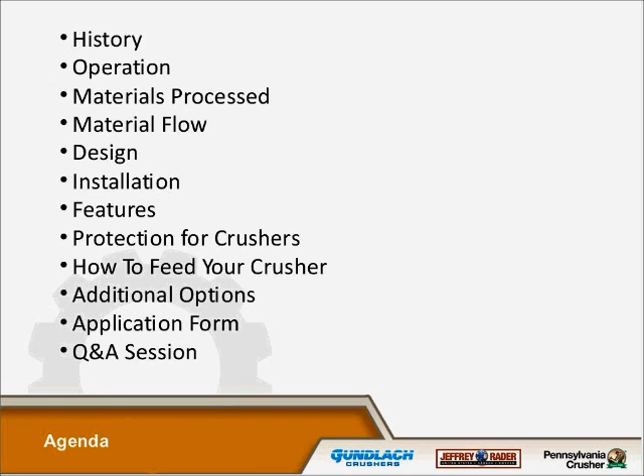The crushers are applied in coal mining, coal preparation plants, power plants, refineries for crushing petroleum coke, steel industry for metallurgical coke, industrial minerals, fertilizers, potash, clay, nickel ore, and several other ores. Lime, limestone, fluidized bed boiler sorbent is one of the things it's used for. Aluminum industry, the bath and anodes, which is a recycling circuit in the aluminum plants. Salt, glass, among other applications.

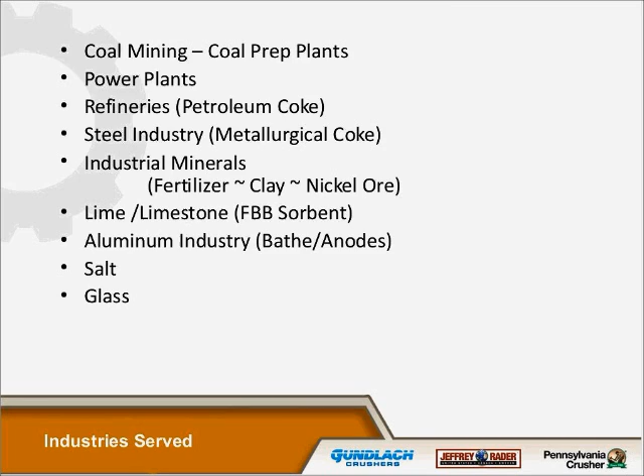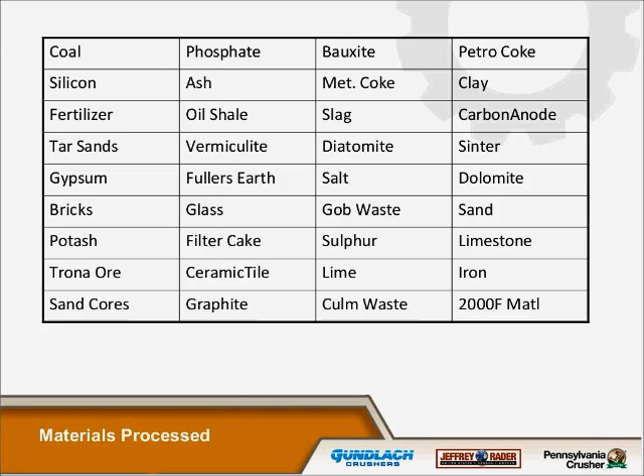The types of roll crushers are: single roll against a breaker plate, the single stage 2-roll crushers, 2-stage 4-roll crushers, and special designs for hot material and sticky materials.

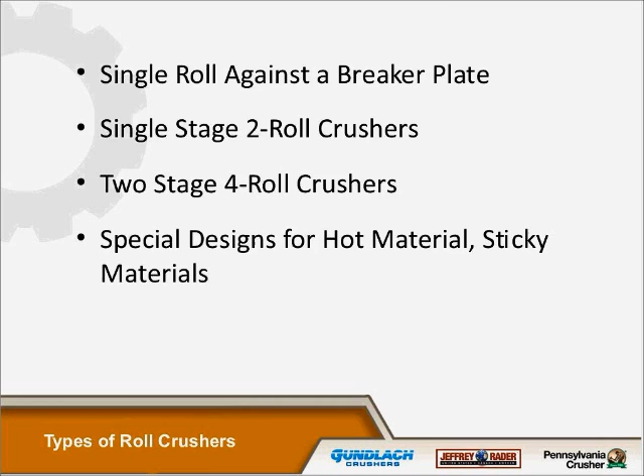The single roll was developed close to 100 years ago to crush run-of-mine coal. The 80-30 breakers were developed in 1972. Many are still operating in the Powder River Basin, Wyoming, New Mexico, Arizona, and South America. The breaker was developed to perform primary and secondary crushing all in one unit. It has approximately a 24-to-1 size reduction, run-of-mine down to 2-inch or 50 millimeter. A smaller model 4-roll crusher was developed for Stoker, the house coal, back in 1948.

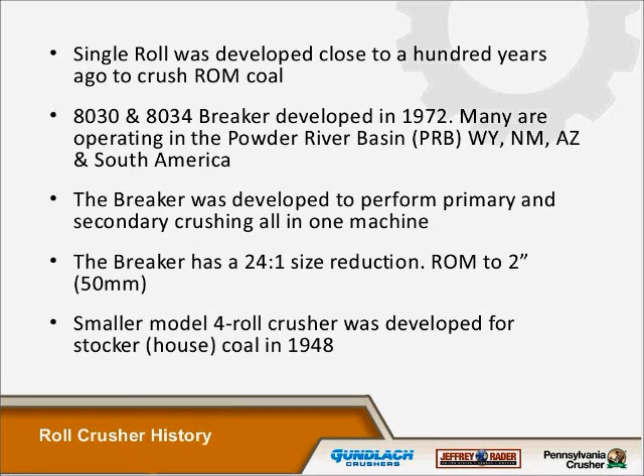The 80-30 breaker is definitely a workhorse in the industry. Most manufactured back in the 70s are still operating. The breaker started off as a 2-motor drive, definitely a 4-roll, and it's evolved to 4-motor drive, also employing the Nitroil system on the machine, which I'll talk about a little bit later. This machine can take up to a 60-inch lump and size it down to approximately 50 millimeter.

The machine is also carriage mounted for ease of maintenance. If you get a non-crushable in this model, it has approximately a 28-inch stroke in the main cylinders and approximately 5 inches of stroke in the secondary cylinders.

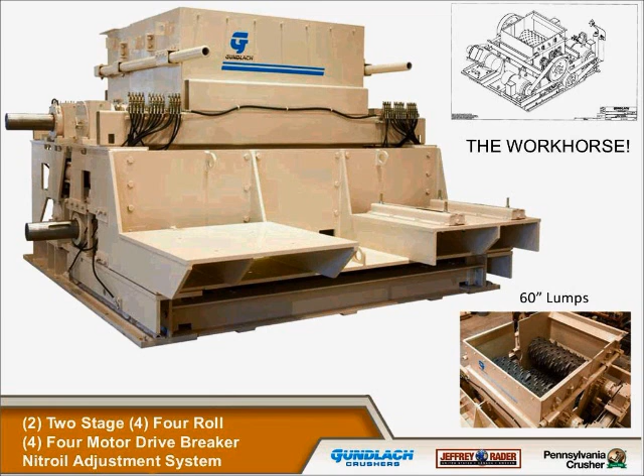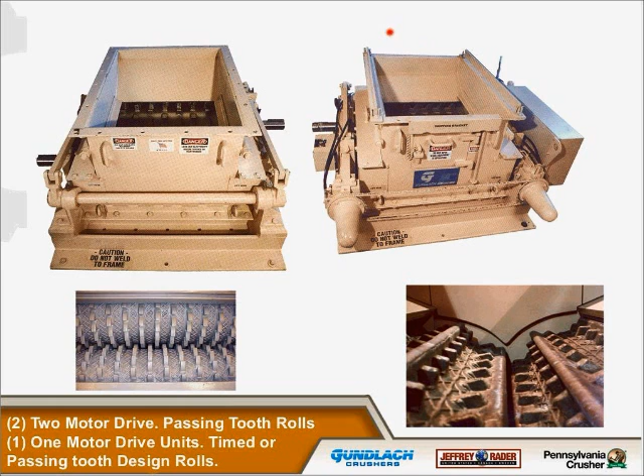This model also has maintenance doors, has dribble chutes. Any material that could come out of the crusher box will go down into the discharge area, which is incorporated into the discharge chute.

The 5000 series has an electric pump for moving the oil into the cylinders for roll positioning. The Nitroil system basically works like a gas shock on your car, but you can add or subtract the nitrogen pressure or holding force to keep the rolls in position while they're crushing the feed. The Nitroil system also gives you a nice quick way of adjusting the roll gap. By manipulating a couple valves with the electric pump, you can adjust the rolls in very short time.

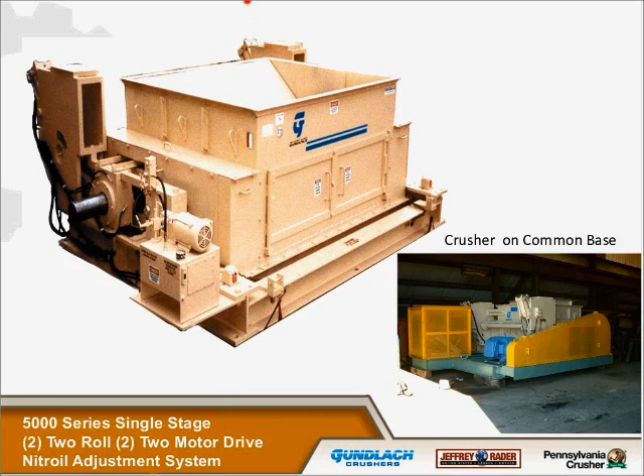The single stage is again a primary reduction, 6-to-1 reduction ratio, and like I said, the frozen coal cracker is basically for summer use. They are V-belt driven.

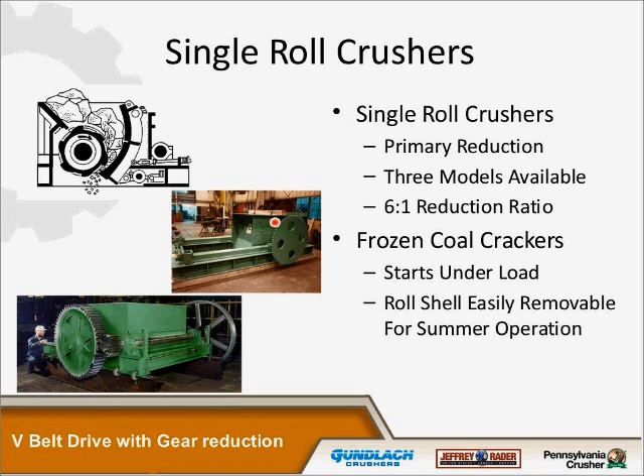The two-stage four-roll crusher, the model you're looking at is a 3000, and when I'm speaking about the series machines, we have 1000 up to 5000 series, and the bearing shaft sizes and the other componentry just get larger as the crusher gets larger. So this one is a four-roll, one-motor drive.

Chain secondary drive drives the top rolls to the bottom rolls. The gearboxes, the upper gearbox here drives the upper rolls, keeps them in time, and the lower gearbox connects the two lower rolls and keeps them in time. This machine can take up to a 24-inch lump.

This model would be a 3000 series. 3 and 15/16 shafts, double spherical roller bearings, Nitroil system, and a standard lubrication system, which is a bulkhead, one on each side of the machine.

The 5000 series is the only one that has the electric pump. The other machines have a hand pump.

The 4-roll basically was developed so the upper rolls are to pre-crush the material, giving the lower sizing roll an acceptable size so you don't get any buildup between stages.

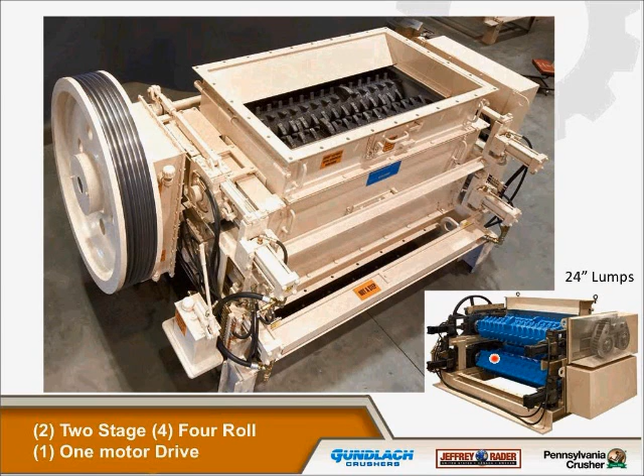Normal reduction we like to see is like a 3 to 4 reduction. That's each stage gives you that reduction. A 4 to 6 foot drop is ideal. The trajectory of the feed coming into the crusher is very important, spreading in the material across the entire length of the rolls.

Grab material, crush material, discharge, and take the material away properly. Retaining material generates fines and wear. So basically we want to take the material, grab it, crush it, and discharge it. Retention creates fines and wear.

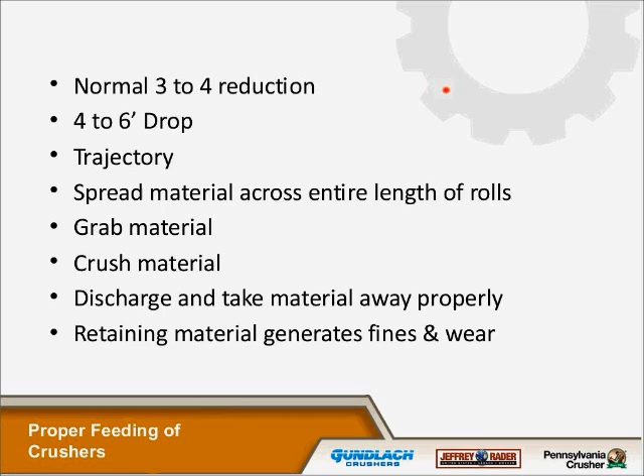Just showing another picture of how the material comes into the machine. Again, if the material gets too large, it'll basically popcorn on the top of the rolls, and the rolls will chew away at it, but the problem is it's got all this other tonnage coming on top of it, and it doesn't have time to do that.

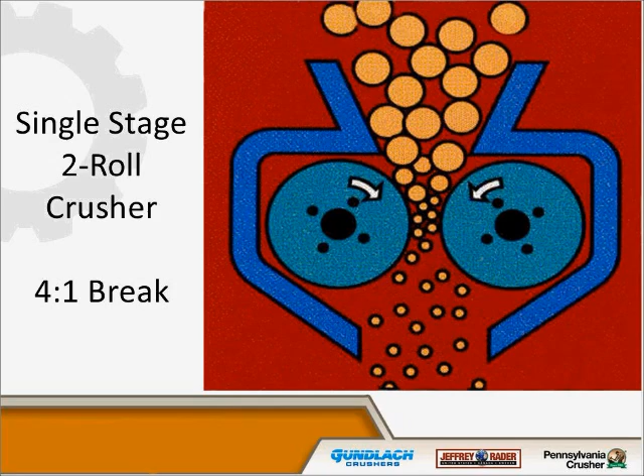Again, the 4-roll machine, 4-to-1 break top stage, 4-to-1 break bottom stage.

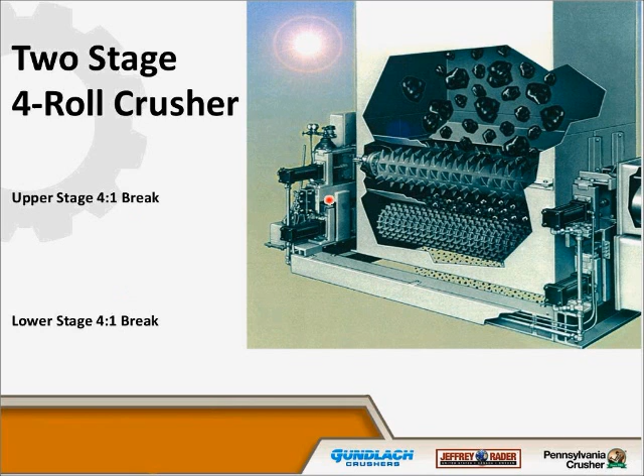A good way to feed the machines is a vibrating feeder. Jeffrey Rader makes a real nice vibrating feeder. Electromagnetic or electromechanical are brute force type feeders. This spreads the material across the length of the roll and allows the material to drop into the crusher rolls properly.

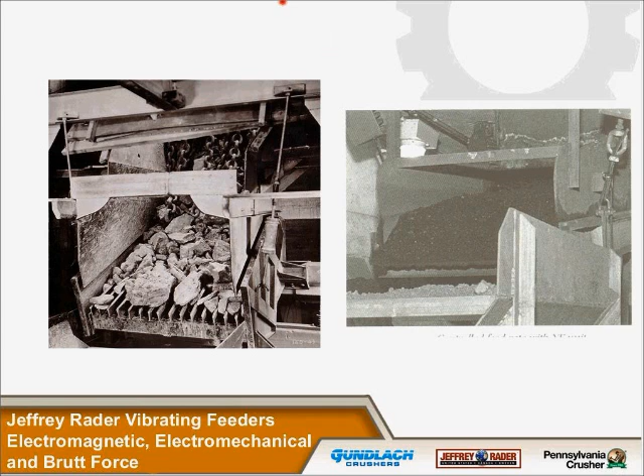It's a typical installation drawing that we send with quotations. Shows what we like to see. We do realize that retrofits, it's a give and take situation with the retrofitting of a machine. But this installation, if the equipment's put in properly like this, having the proper drop, spreading on the material, and a proper discharge area underneath the machine, you want to take it away as fast as you're putting it in. It works out very well.

We even put in the type of trolley beams and lifting devices you'd need for the crusher rolls and motors and other things like that. Protecting the equipment is always important. Magnet, metal detector is important to protect your equipment.

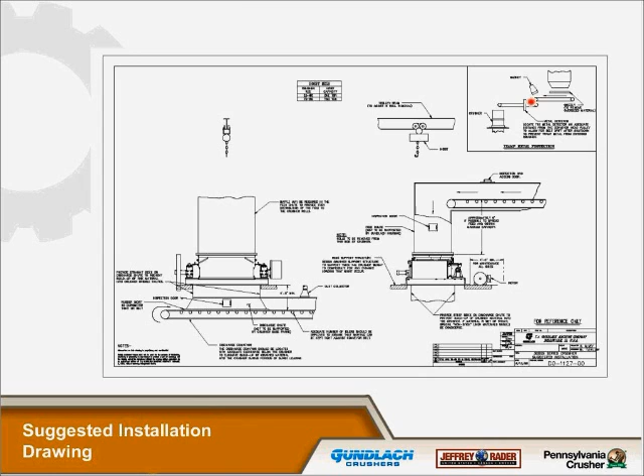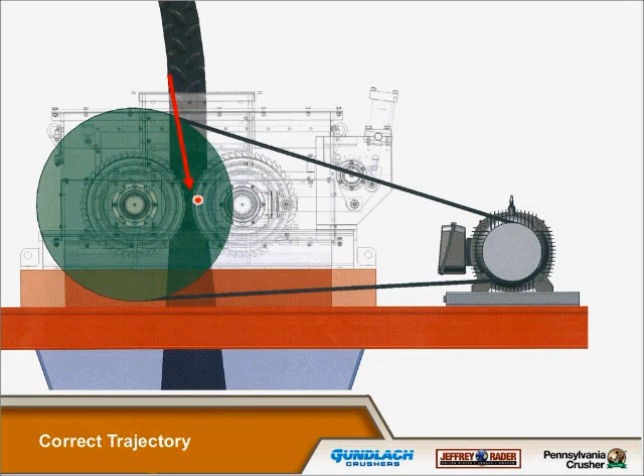Shows another slide of how the material should come into the machine. Like I said earlier, the nitrogen system that's on the machine is preset with the pressure to hold the crusher roll in to do the normal crushing. But yet if a non-crushable enters the machine, this roll will force that pressure back, cylinder back, and allow that non-crushable to go through, basically overcoming the preset pressure. The pressure can be increased, but that allows for more pressure to force the roll back.

It's showing how the material should be spread across the length of the roll to get your maximum throughput. Maximum roll life is very important. The capacity is determined with the roll crusher basically by your roll gap, roll length, the speed of the roll, and the RPM.

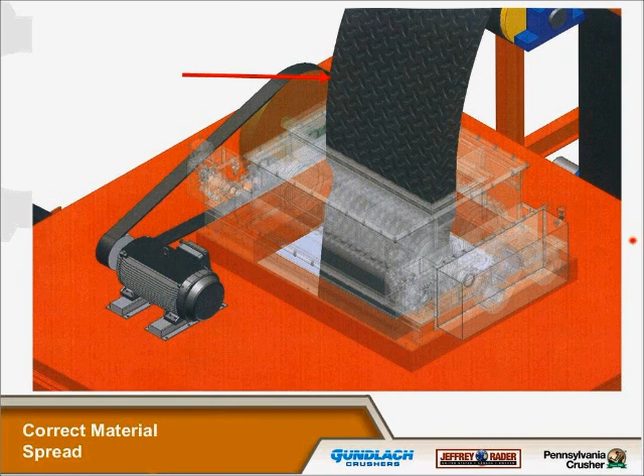This is a view of what some of the rolls look like if you're not feeding it properly. This front roll here basically was beyond repair because it got into the base metal of the roll. The other one, the teeth are still intact. That can be rebuilt. But it's important to spread that material across that entire length of the roll.

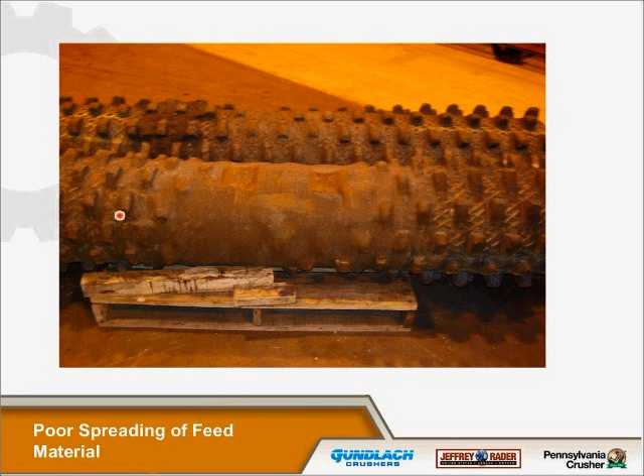This is another set of rolls that were not being fed properly. They lasted about 6 months. Fortunately, they pulled them out because they were having some capacity problems, so they will be rebuilt.

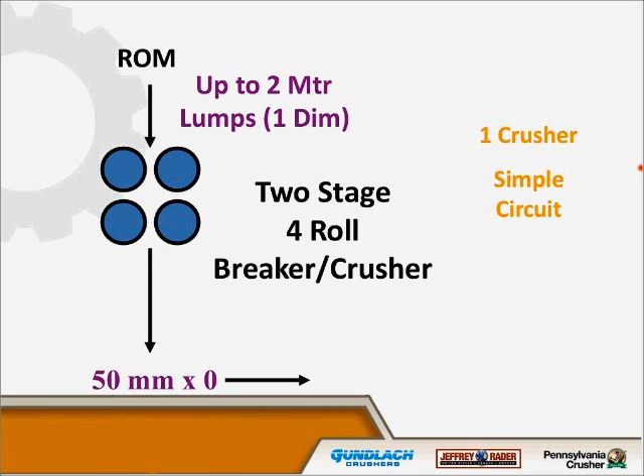One of the simple installations is a simple circuit, basically with the 4-roll. Like I said before, you're taking the run-of-mine material and crushing it down to 50 millimeter.

It works really well in run-of-mine applications. Some of the other applications, material warm or hot, 350C, boiler clinker feed, let's say 25 millimeter by 0, product 95% minus 8 at 12 metric tons per hour.

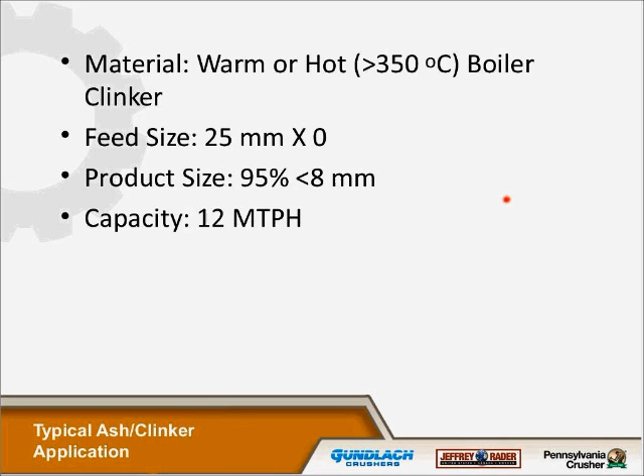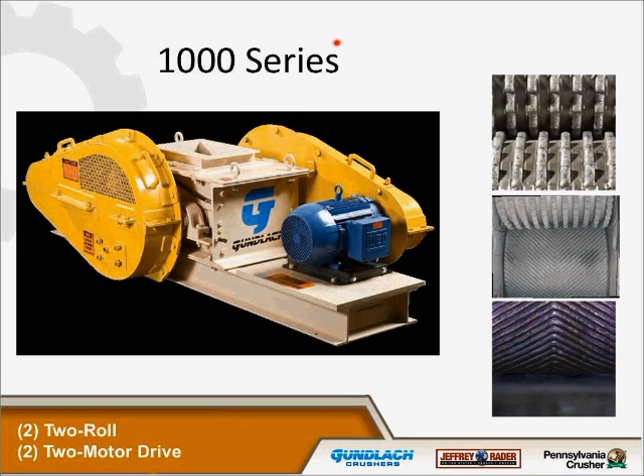We've installed some of the smaller machines for these applications, 2-roll 1000 series, with different roll configurations we can put in this machine: the smooth, small chisel tooth, or herringbone.

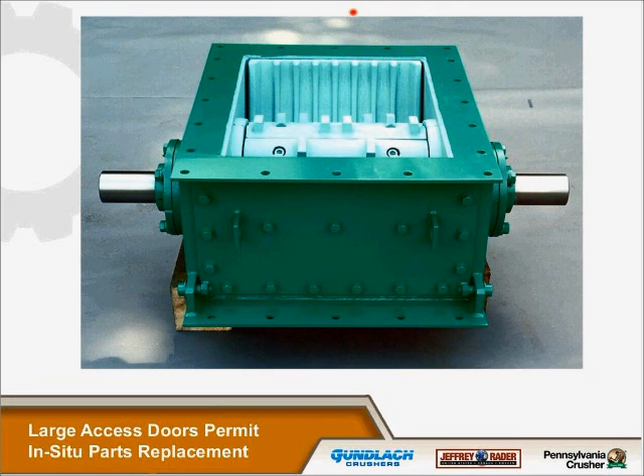The other machine used on clinker before is the single roll, easy access, well sealed. You can replace the parts definitely in situ. As you can see, the side folds down and you can access the wear components very easily. Again, this is installed mostly in bottom ash or clinker installations.

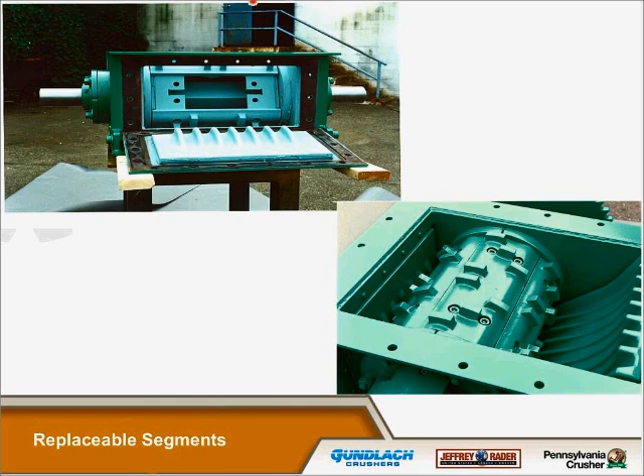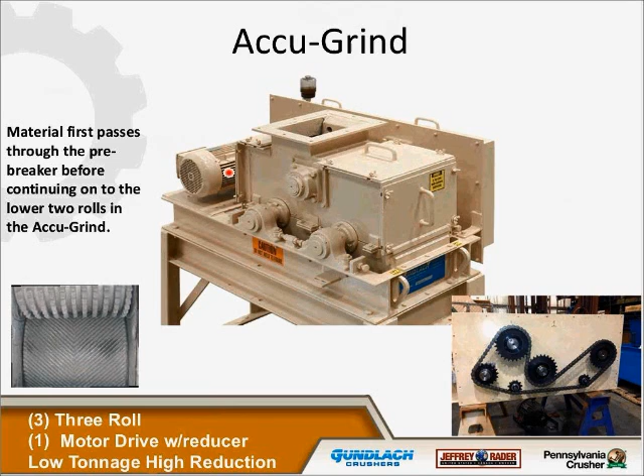Some of the features of the machines, we definitely have some unique features. I'm not sure of any other manufacturer that sells crushers with coupling mounted rolls.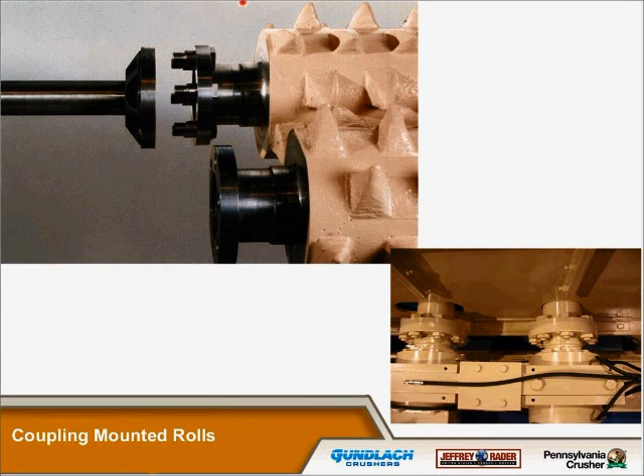The coupling mounted rolls are set up so that you don't have to disturb any of the main bearings to get the rolls in and out of the machine. We do have some models that are not coupling mounted, but the majority of the machines are coupling mounted.

As you can see with this slide, the rolls are out of the machine. Main bearings are not disturbed. We do have to loosen V-belts and support the pulley because the rolls are supported from side to side of the crusher.

We supply the removal rails with the machine. It's actually a tool to support the roll until you get it out where you can pick it up with your lifting device.

One of the other things that's really important is don't allow any of your chute work to rest on our crusher, because of roll removal especially. Plus, we don't want the weight of the inlet chute on our crusher.

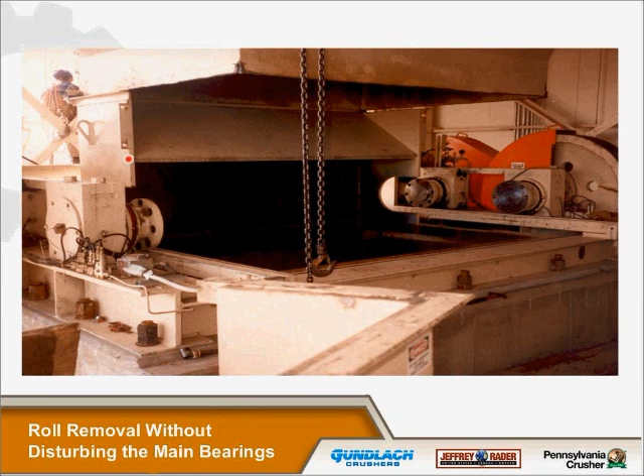The housing, as you can see, is split in many different ways for ease of removal, and the chute resting on the crusher would be a real problem.

The machine has wheels on it to raise it up and move it from underneath the flow of material, mostly for maintenance or replacing of the crusher.

The guards, we actually manufacture the guards. We split the guards for ease of removal. Works out very well.

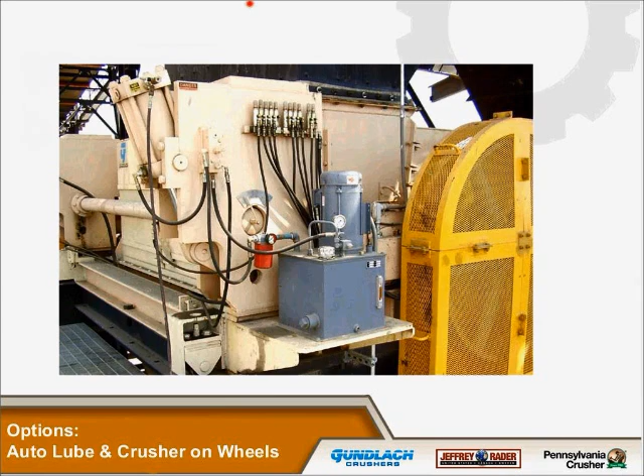Some of the other features are segmented rolls. On the 4000 and 5000 series, we have segmented rolls for the 24-inch, 30-inch, or 36-inch diameter rolls. The segments could be 40 inches long or 20 inches long, and there are 4 around the circumference of the roll.

It makes for a real nice change out for maintenance, because in the larger crushers the rolls are very heavy, and removing rolls can be a little safety issue. So having segmented rolls works very nicely so that you don't have to even take the roll out of the machine.

The upper rolls can have segments on them with grab teeth. The lower rolls can have segments on them with the chisel tooth. Segments can be rebuilt many times; normally about 3 times is a good life of the segments.

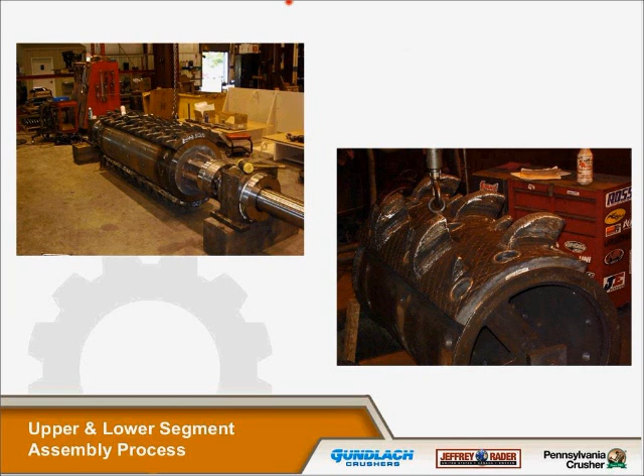To extend the life, we've incorporated a chisel tooth with a carbide tile on the front. It's welded onto the tooth and has little carbide chips in it, which helps extend the life of the tooth. We also have available a tooth, an entire tooth with carbide made into it.

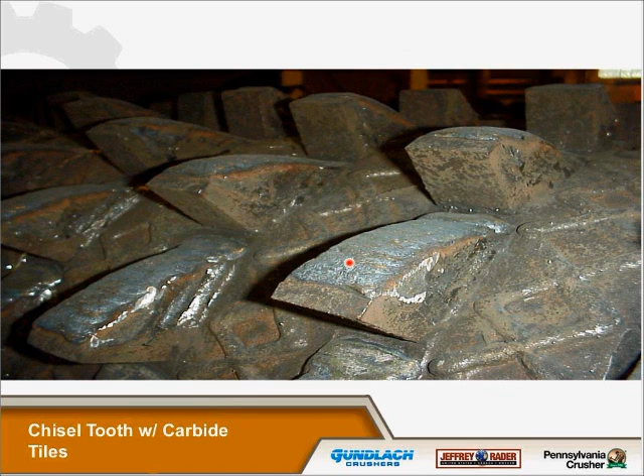The bearings on the machines are double spherical roller bearings, self-aligning. We have a series of seals, kind of like a taconite seal. It's a lip seal on the outside, a felt, and a labyrinth on the inside. This helps prevent wash down of the equipment, the water and so on, from getting into the bearings. Very good seal arrangement.

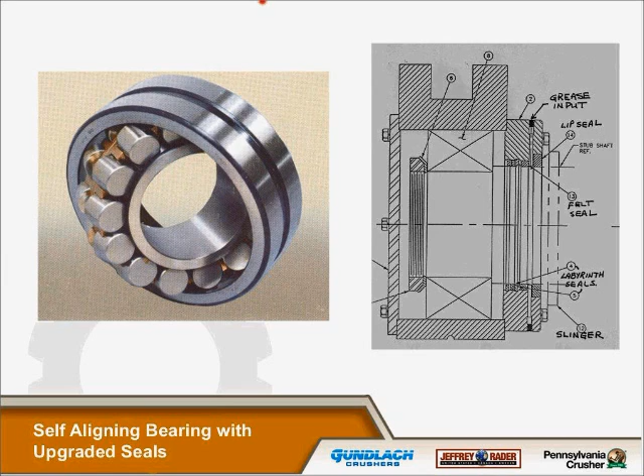As you can see, the housings, as I mentioned earlier, are split quite a few different ways. You can get them where they don't have as many splits, as you can see in this piece here, but it makes it very easy for roll removal.

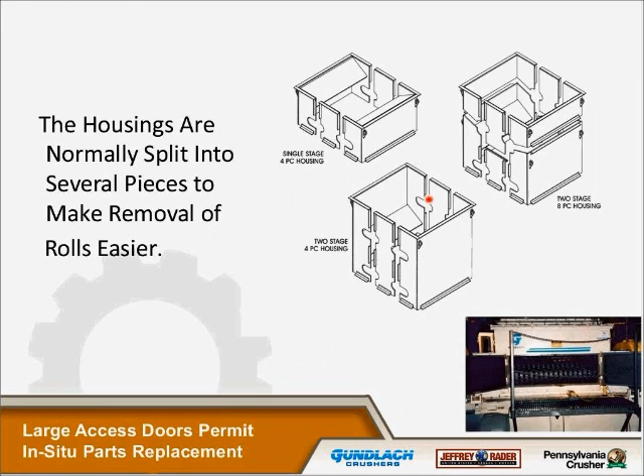The slope plates in the machine help divert the material into the center of the roll. They can be made of carbon steel, can have a ceramic lining on them, or can have AR plate on them, whether bolted or plug welded. It's just a choice of the customer.

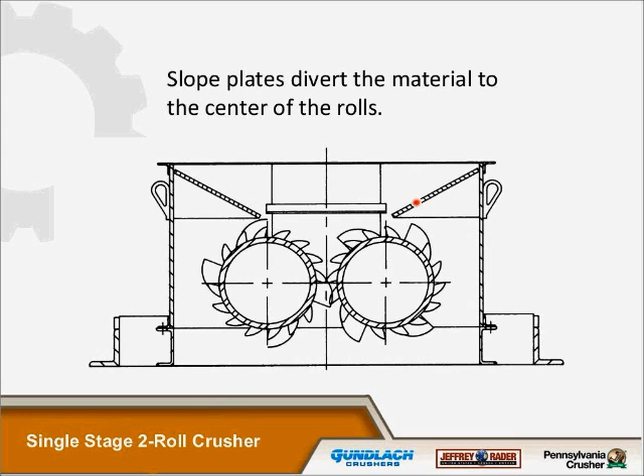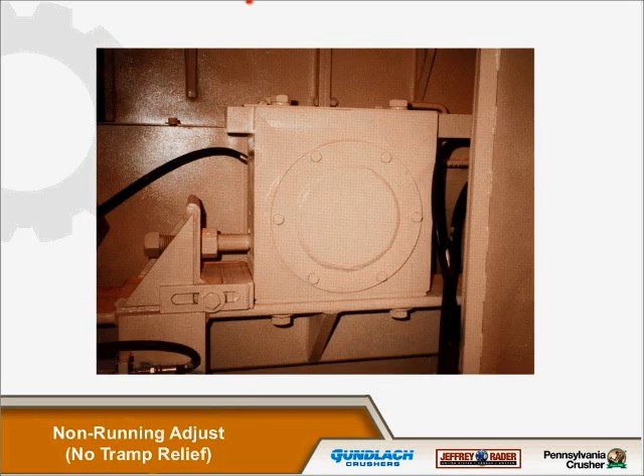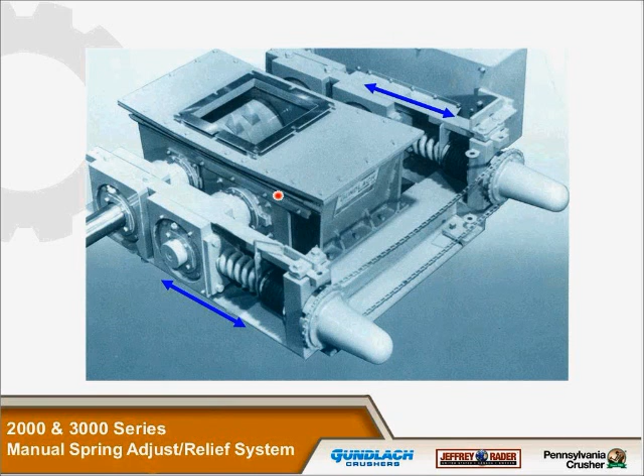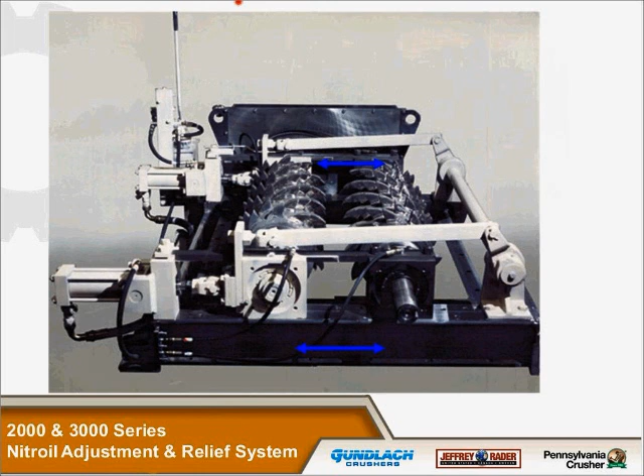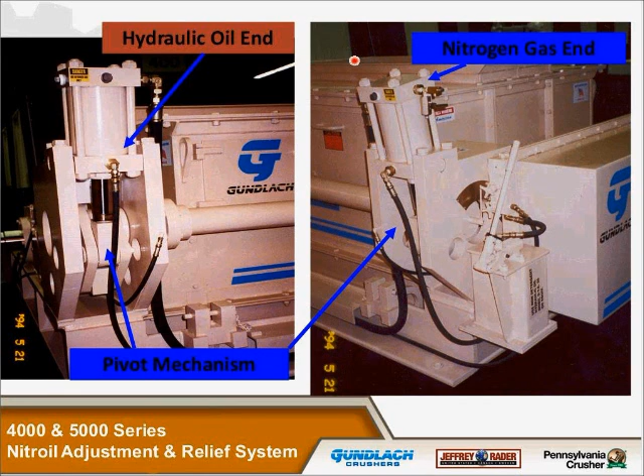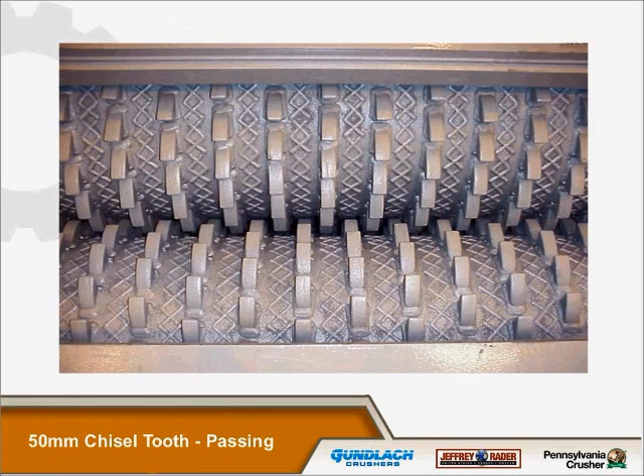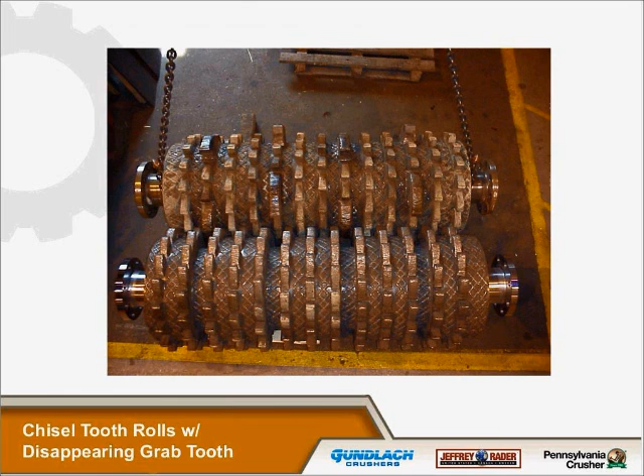Lower chisel tooth, or could be primary set of rolls, passing tooth design. A disappearing grab tooth style, where the crusher is very close to requiring an upper set of rolls, but yet we can get by with a passing tooth design.

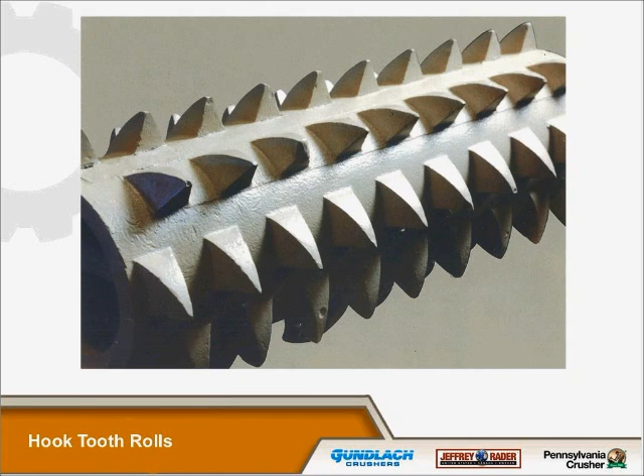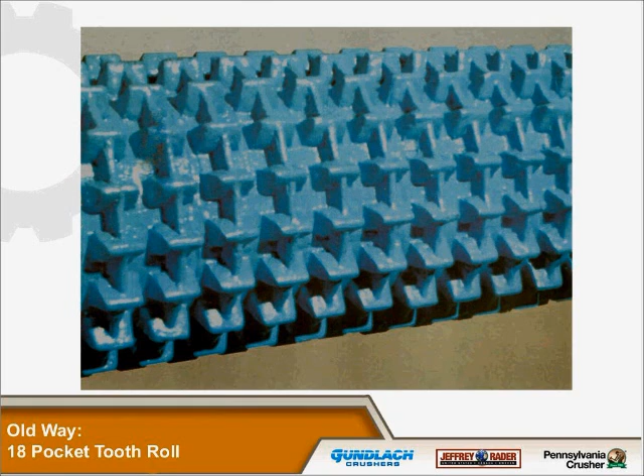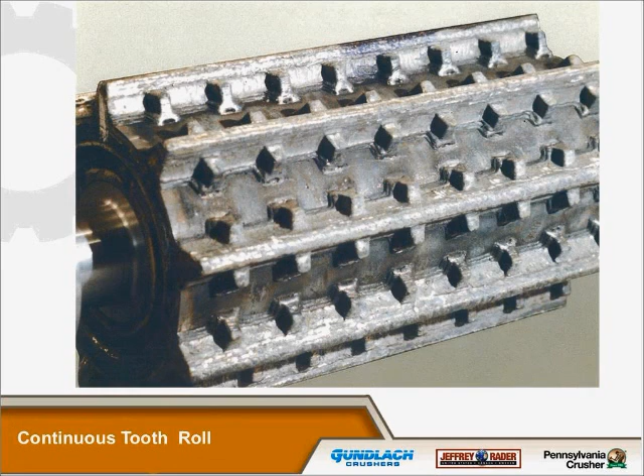The hook tooth design was the original style upper roll for crushing material down to a nominal 2x0. An original 18 pocket tooth roll for making a nice stoker — this roll is still available in the segmented design, however it's been replaced with a continuous tooth type roll. Very comparable product sizing between the two rolls.

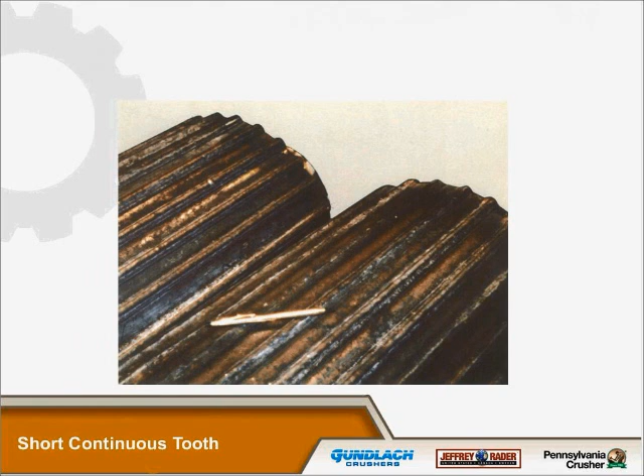Another continuous tooth roll, a little shorter, makes a little finer product. This is a shorter pocket tooth design — you can see where the rib is continuous, the tooth is continuous, and the rib is broken.

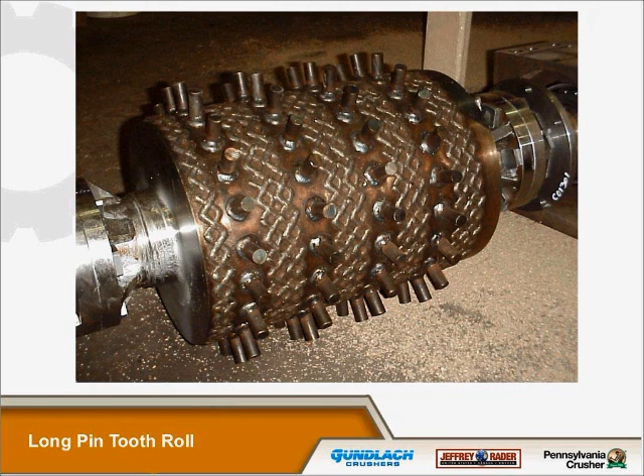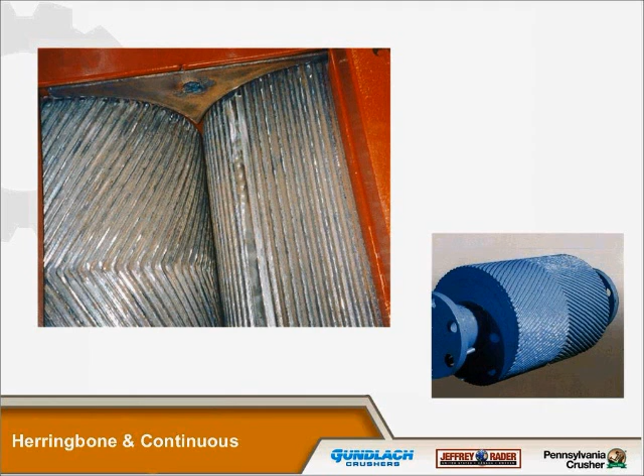The herringbone style roll could have a straight pattern or the chevron pattern. The diamond pattern is basically a double herringbone.

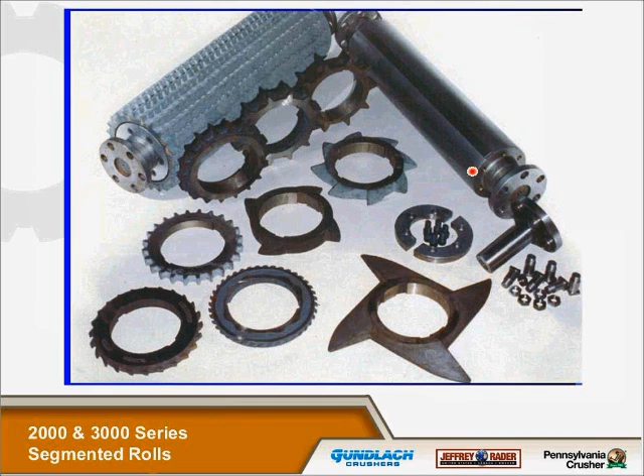Segmented rolls, circular segmented rolls, are for the 2000 and 3000 series. They can be used for clean coal, fertilizer applications, and hot applications. You can put different style segments on the backup roll and configure your roll.

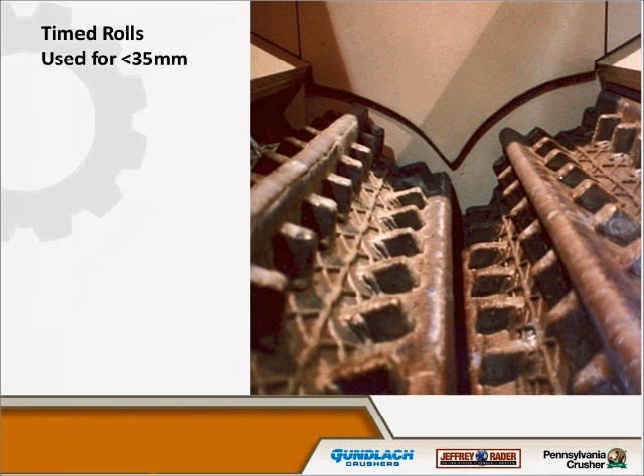Again, the continuous tooth requires a gearbox. We can crush down to, actually, timed rolls used for minus 35 millimeter. We do a really nice job of three-dimensional crushing — it crushes in two different planes, where you're crushing in this plane and this plane here, where these teeth come in and mesh.

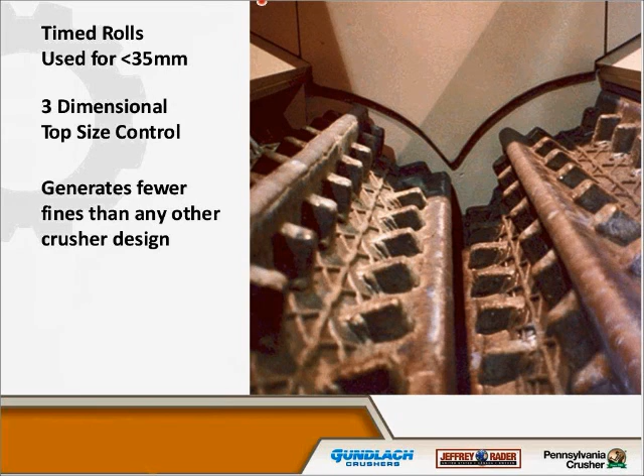They generate fewer fines because we're only crushing what needs to be crushed. Impact crushing smashes the material, creating excessive fines.

These crushers, basically we're doing compressive crushing and not creating a lot of fines.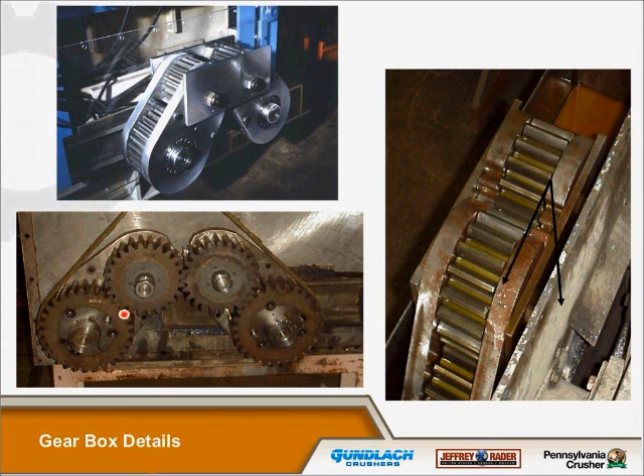The gearbox is also designed as an enclosed gearbox, we call it, where you can bench build it. You can get a spare gearbox, send it in, we'll rebuild it. We have templates we can use, and send it back to you all completely rebuilt with a warranty on it.

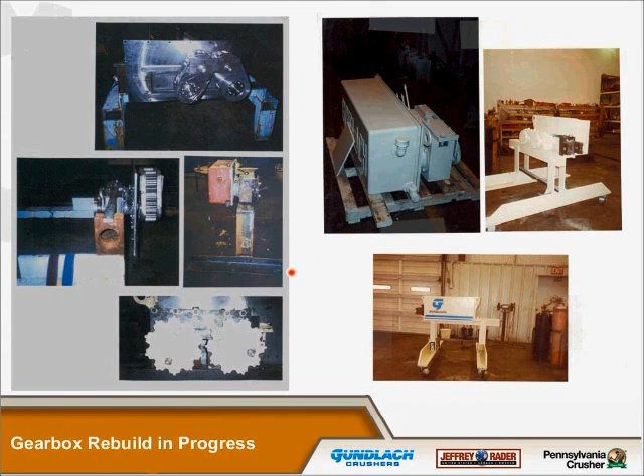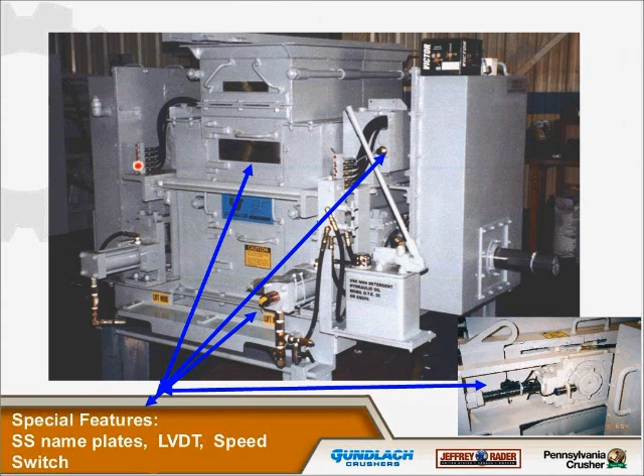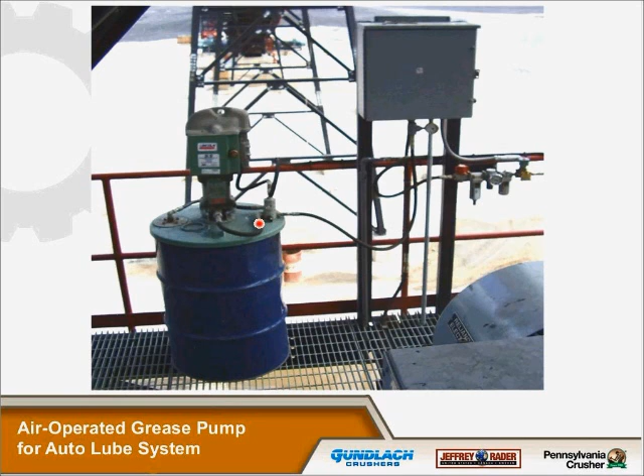This here is a Lincoln system we have on some of the crushers. It is an upgrade. It can be operated pneumatically or electric with the pumps. This is a pneumatic system with a timer. Another view of the different reservoirs that can be supplied with the machines.

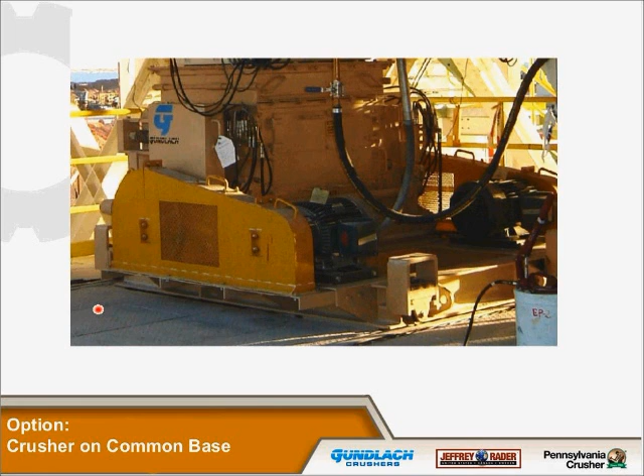The data that we need as far as applying the crusher is listed here. A lot of basics, but there's some information that we really need in order to understand the application and size the crusher properly.

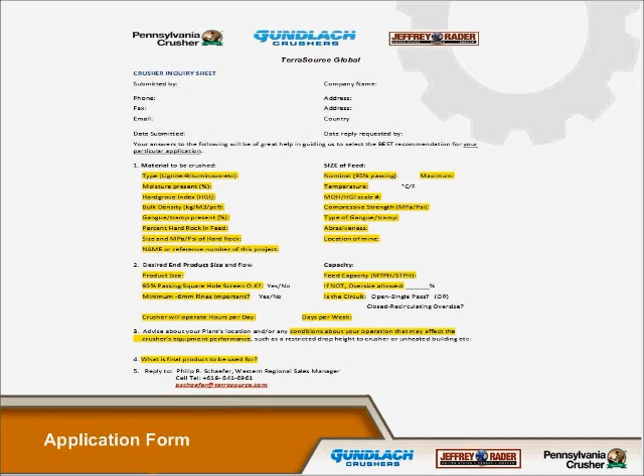So if you have any particular applications you want to share with us, please complete the form and submit this.

So if there's any questions, feel free. The lines are all unmuted now, so go ahead and ask questions. We're unmuted? Yes. Just a question on the roll teeth.

You know, there's a number of ways to get them on there. It looks like they're welded on in hard surface. Who decides the material of construction or the hard surface? Customer, or does Gundlach suggest based on the application and their background?

We have our standards. If a customer wants a particular type of hard facing, as you know about hard facing, the harder it is, the more brittle it is. So you have to make a decision whether, if it's 3 times the price, can you keep it on there to get your 3 times the life. But we do have our standards. Most teeth are welded on, but we can do some different special things. The tooth alloy, we have forgings, and we have castings, and we have burned out teeth. So we have a variety of different types of tooth makeup.

Okay. Well, as a new rep for the Gundlach line, I probably would just discuss it with my regional manager in advance and see whether we have recommendations or the customer has history with our machines and so on, I guess.